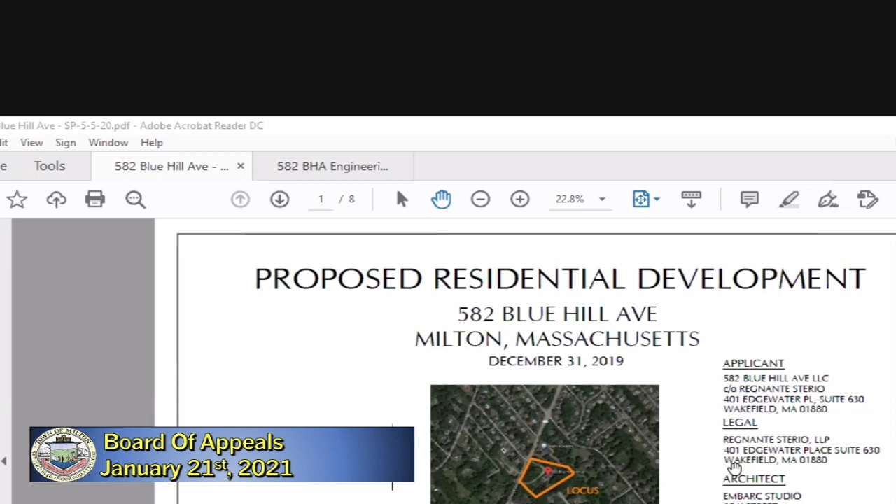The cover sheet is exactly that. It shows you a locus of where the site is, located along Blue Hill Ave. We typically use a Google Maps insert with north straight up. It gives you an idea that Blue Hill Ave is running in a northeast-southwest direction. Team members are here. Contact information you can all find over in this particular location here.

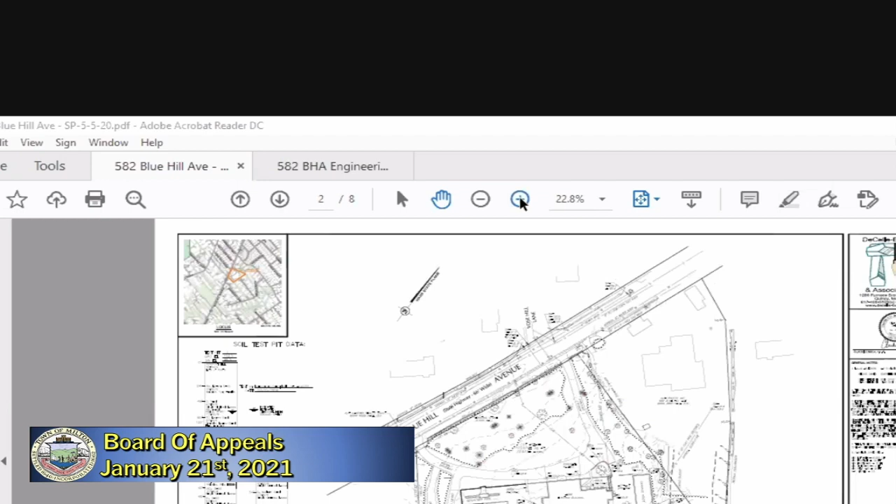The second sheet is a land survey plan. The detail on this particular project was substantial with regards to the house and the number of trees that we had to locate, the wall along Blue Hill Ave, the utilities. Also, you'll see you have an existing 12-inch water main along with a 6-inch water main located on the other side.

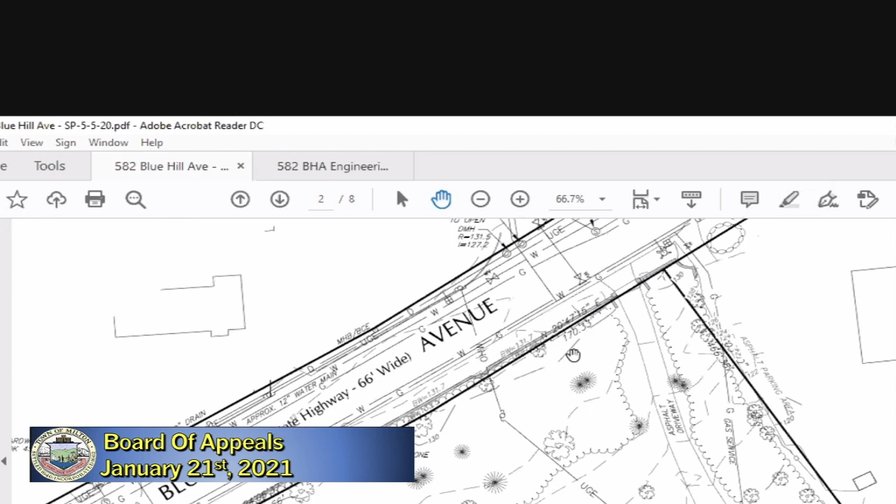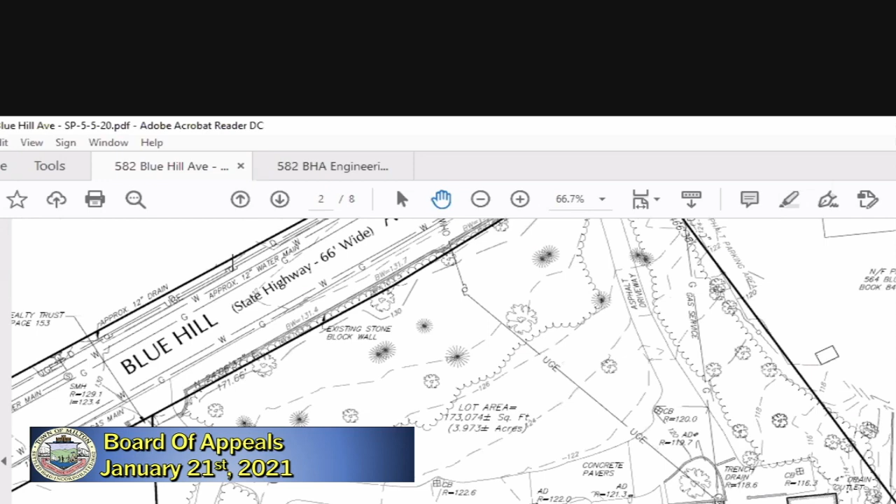You'll see the stone wall that isn't retaining, it's just more decorative, that provides privacy for the lot itself. You can see the detail for the existing homes and the carriage house, along with the circular drive that provides access into the lot currently. You have a gravel drive that provides access to the back, to a lawn area, as well as a bocce court, which I'm a fan of, to tell you the truth.

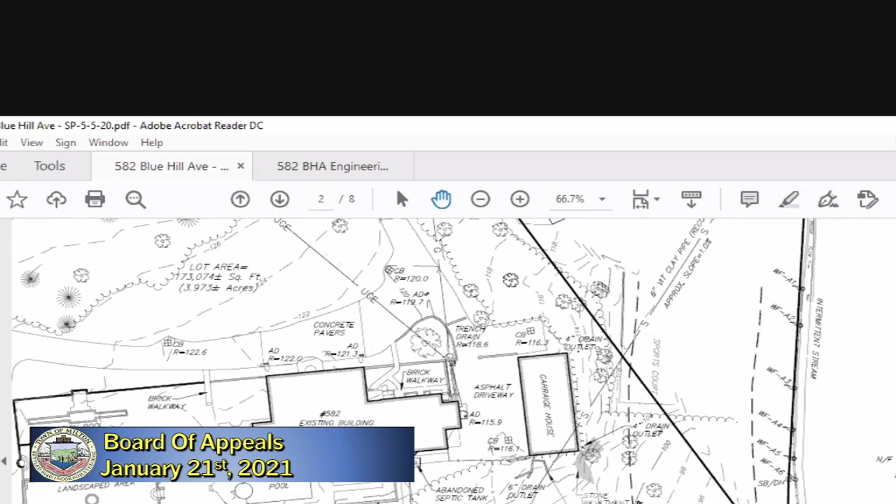Also, we've located a wetland. We've received an ORAD from the Milton Conservation Commission with regards to the wetland resource that is located off-site. It's a bank of an intermittent stream located with the wetland flags here. We had a professional wetland scientist, Ecotech, out of Worcester, delineate this and prepare the filing with the Conservation Commission. You can see the applicable 100-foot buffer that comes onto the property, which is the reason why we had to delineate that particular stream.

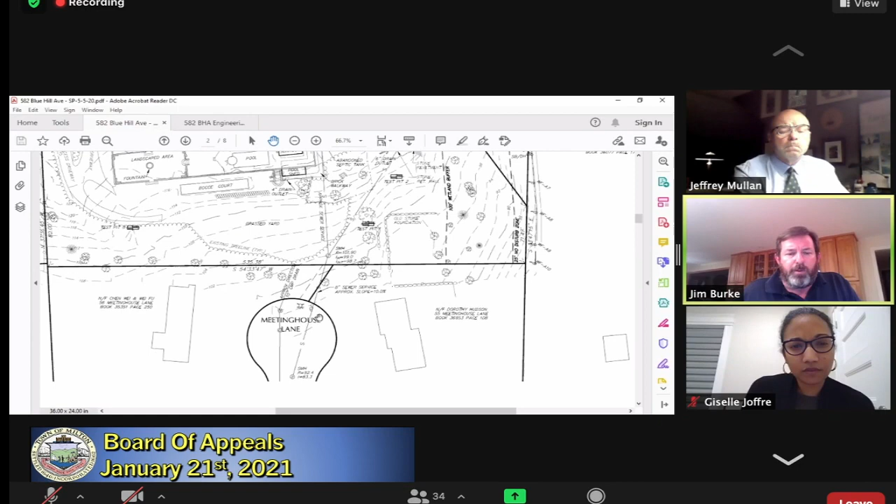Down south, you can see a little bit of detail that we did on Meetinghouse Lane. The drainage, as well as a sewer manhole, provides some utility identification for Meetinghouse Lane and how it impacts this particular lot.

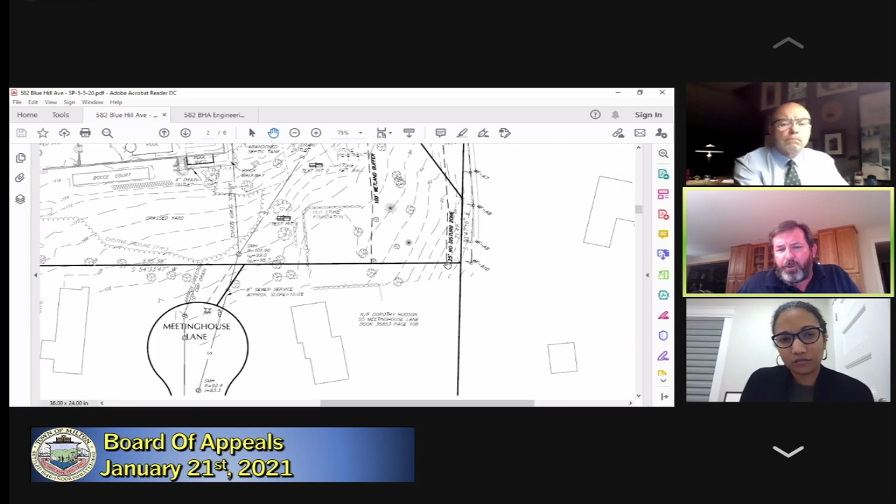The topography, you can see we're running at about, I think that's elevation 130. My eyes are getting bad. Let's see, yep, 130. And it slopes all the way down to the westerly corner to an elevation, I think that's, let's see, I'll take a peek at that as well. There we go, here's 90 here, and it drops off significantly in this particular location.

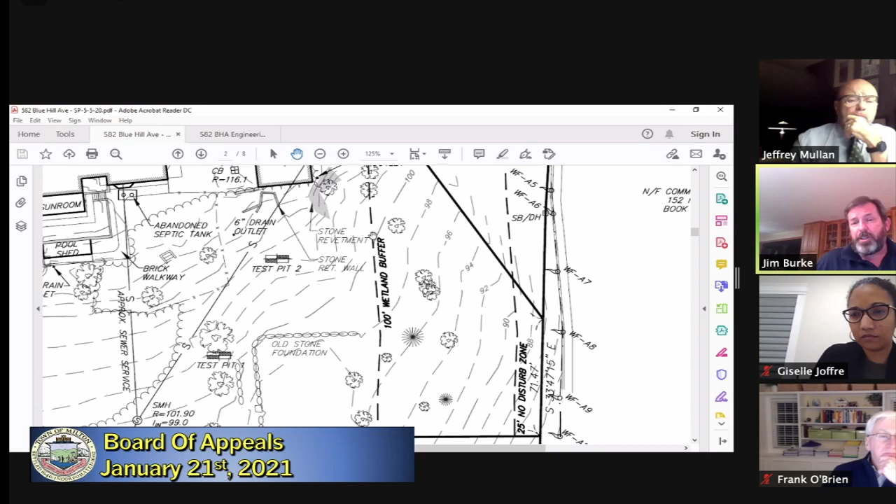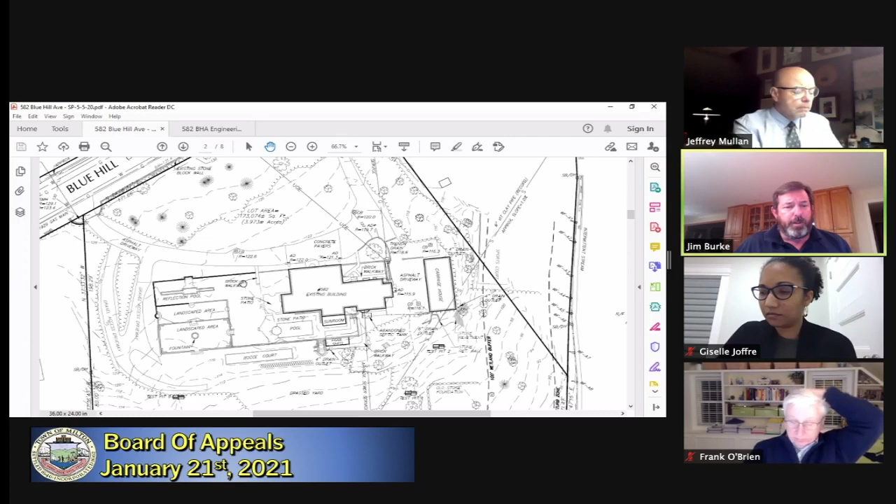But you're looking at a decent slope for the particular lot. But you can get kind of a total view of the lot, and everyone will be able to do the site walk and get a feel for the 4 acres that we've detailed on this particular plan.

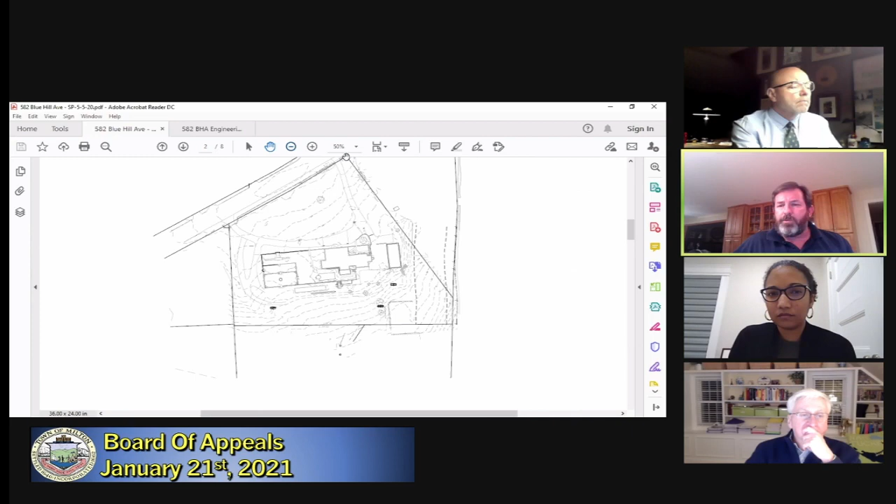What I'm trying to do is move to the next page. There we go. Let's try that.

The next plan is a construction management plan, really just designed as a precursor to a SWPPP permit, which is, since this is over an acre of construction, that we'll have to file a permit with the federal government to make sure that we're doing it in a manner that meets sediment control, stormwater control, et cetera, during construction.

We have an erosion control barrier running around the perimeter of the site at the limit of work. You can see the construction apron here. We're going to be using the existing curb cuts to access the site, and both curb cuts there. We'll be relocating a portion of the wall to redo the entrances to meet Mass Highway requirements. So there'll be some alteration of the existing wall here.

What I'm also showing here is the removal of some of the trees in the area that are marked out in red with a line through them. Those trees are all to be removed. If it doesn't have a line through them, those trees are going to be staying. As you can see, most of the site is being removed, and we're going to be looking at a clean site to construct the building.

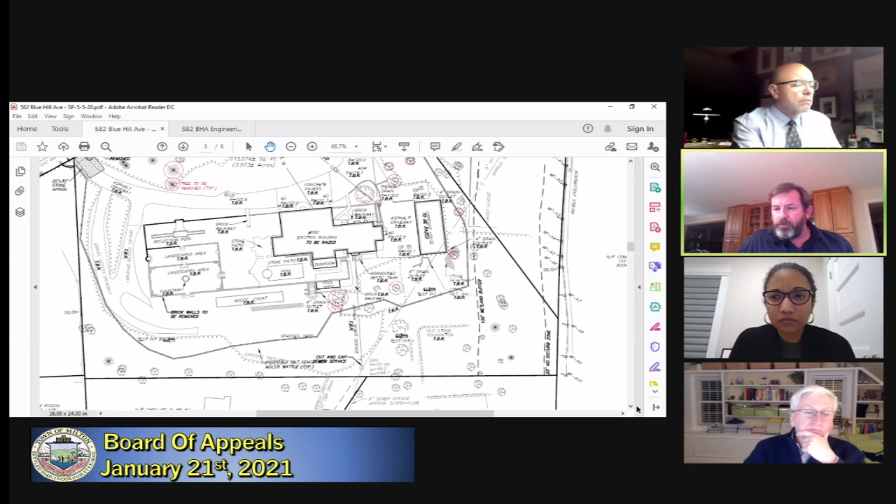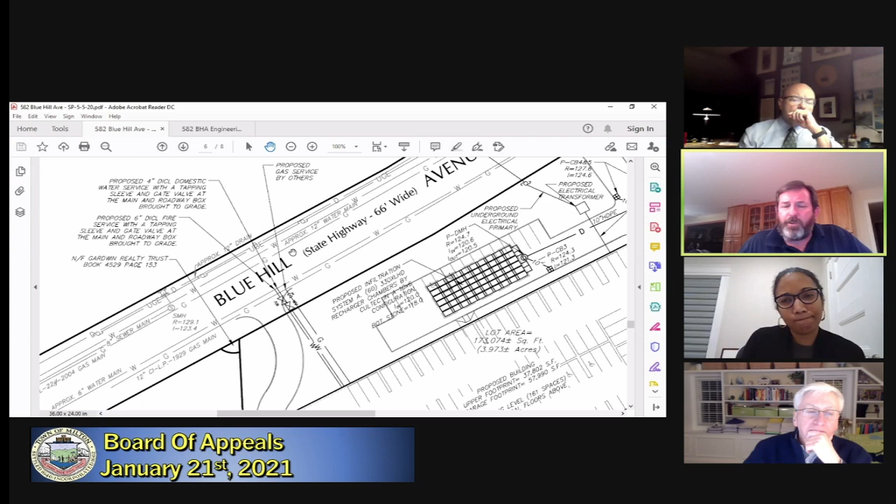So I don't think we necessarily have a problem with that. It's just right now the existing service is connected to the 6, so we propose to do the same. But I don't think connecting to the 12 would be that much of a concern. Gas line, existing main here with a gas service coming in to provide gas service for the building. And again, underground electrical service to here to a transformer here.

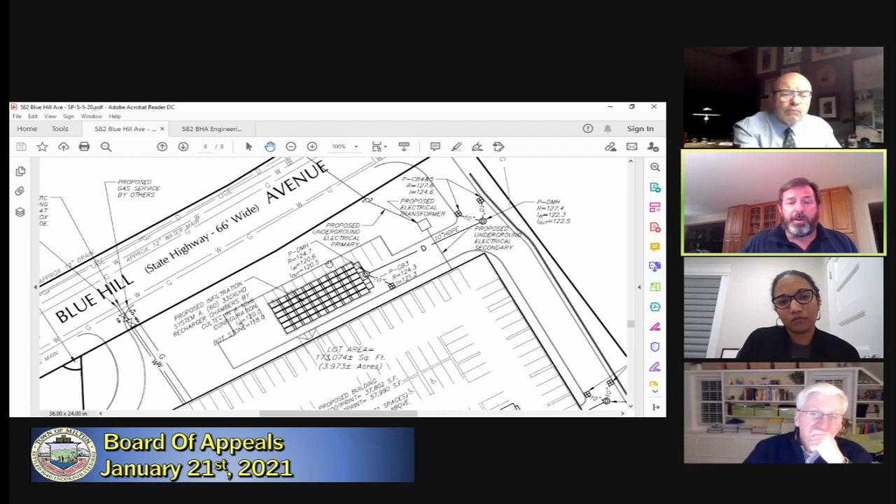Utility purveyors like the gas companies and the electrical company, they'll have some input with regards to the final design, and we can certainly get into the nuts and bolts of that in the future. As far as the sewer goes, the existing sewer is a little unusual. There's an existing sewer service that runs from Delphi Academy across the property, with no really known easement,

but it's there nonetheless. And what we're proposing to do is connect to it here with an underground drainage, underground sewer system for area drains for the garage, as well as the domestic line that'll connect to this line as well, and connect to Meeting House Lane.

This is the existing sewer manhole that we pretty much located both, and I wouldn't necessarily say it's an exact straight line, but we just kind of connected the dots with regards to how this sewer fits. If you look at the existing conditions plan, you'll see as we connect the dots, it goes right underneath the carriage house. That may or may not be true, but the sewer line itself is certainly an acceptable source for a sewer connection.

Now I can guess that the big item tonight is about the drainage. The site right now has, I think, 4 catch basins on it, trench drain and the like, with pipes leading into it from other catch basins and I believe from the house itself. I've never been able to find the outlets,

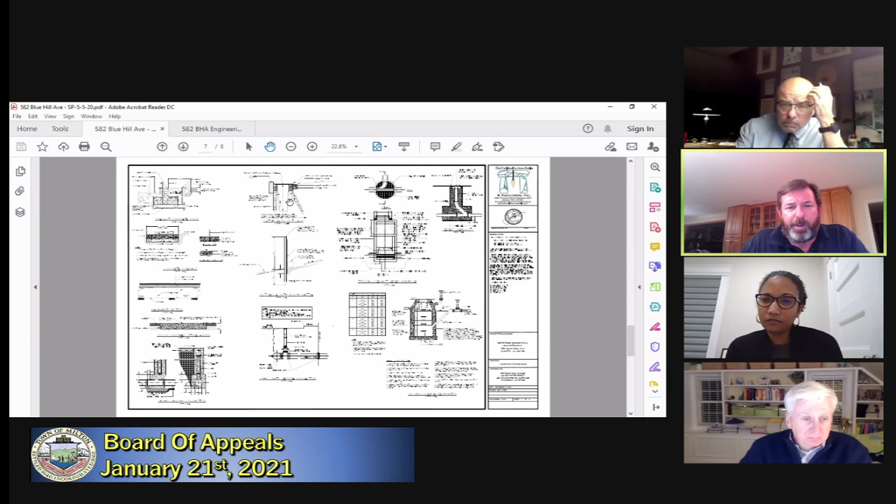The next set of plans that we have really just kind of relate to construction details. You're looking at sewer cleanouts, and this is an oil water separator here, and erosion control barrier here. This is a catch basin insert for construction. Kind of the nuts and bolts to allow a contractor to put together a price for, to really define what kind of structure am I using.

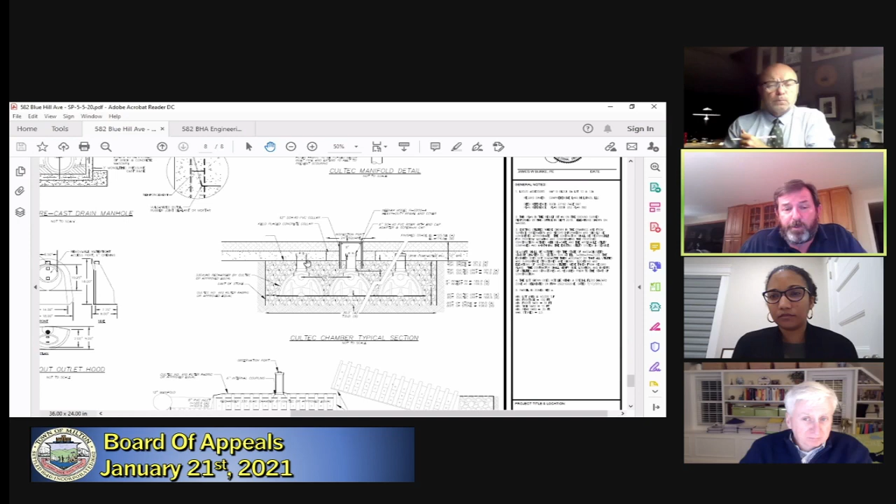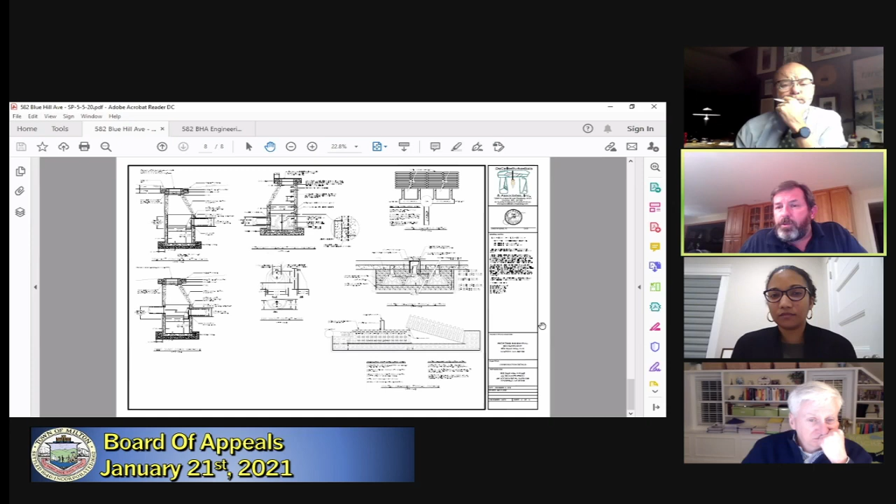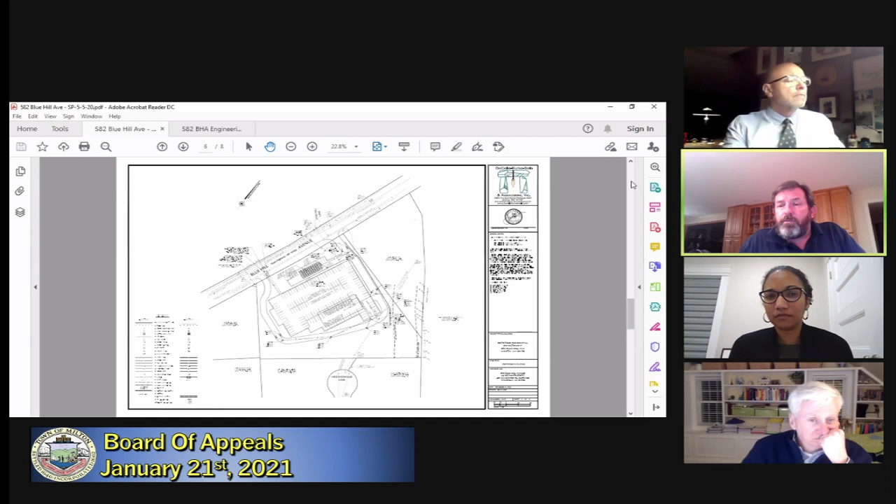You have the deep sump manhole right here. Here's your Cultec chamber system with crushed stone that provides the storage underneath either the paved surface or, for that matter, the building. So I'd say that is the civil site engineering plans. I can go through the calculations specifically with regards to the flow events.

Why don't you hold on that, Jim, and let's get some questions and conversation going. I think there was a significant amount of interest in stormwater flow, offsite in particular. So I think we can get a conversation going, and perhaps you can discuss the calculations at that point. Is that acceptable? Yeah. I'm just trying to figure out how to stop sharing here. No, that's okay. I'm going to have some questions, and it'll be good to share with respect to the plan.

So here's what I'd like to propose, similar to last night. I'm going to ask the members if they've got questions. I've got questions, and I'd like to ask those, and then I'm going to ask Mr. Hill and his team if they've got questions, and then I'll open it up to the floor. I want to acknowledge for everybody, hang on a second, Mr. Stephen Howard, who I know is in the audience.

He sent us an email this afternoon and some photographs. So I want to show people the photos, and then perhaps have Mr. Howard discuss the photos since he took them. And then I expect that the neighbors will have questions on the offsite, and Mr. Howard in particular. So that's coming up. It's along the lines of the questions we asked last night of you, Mr. Burke. But let me start at the top, if that's okay.

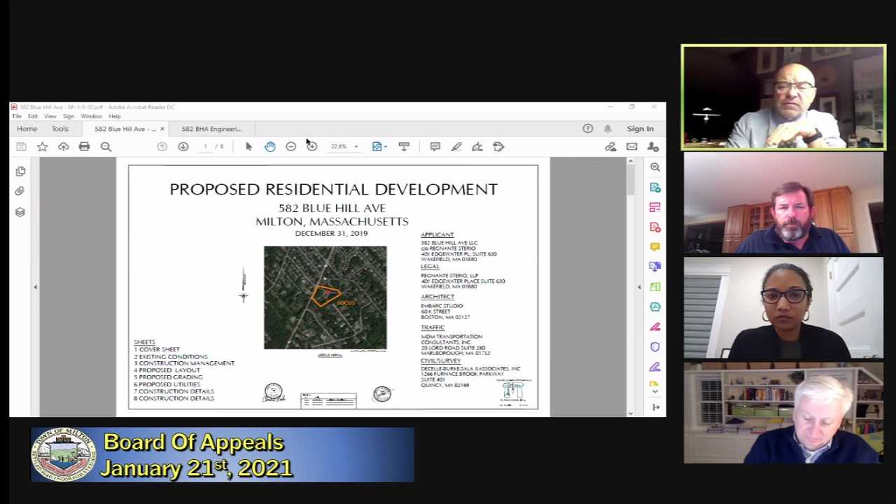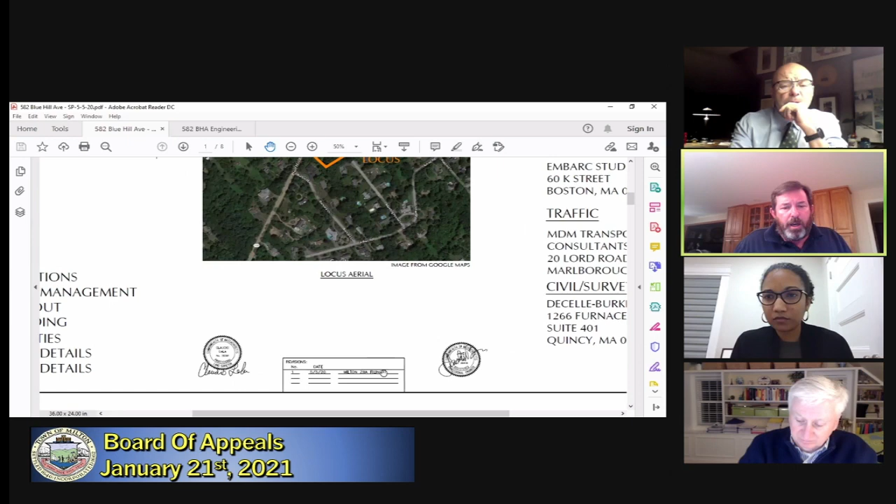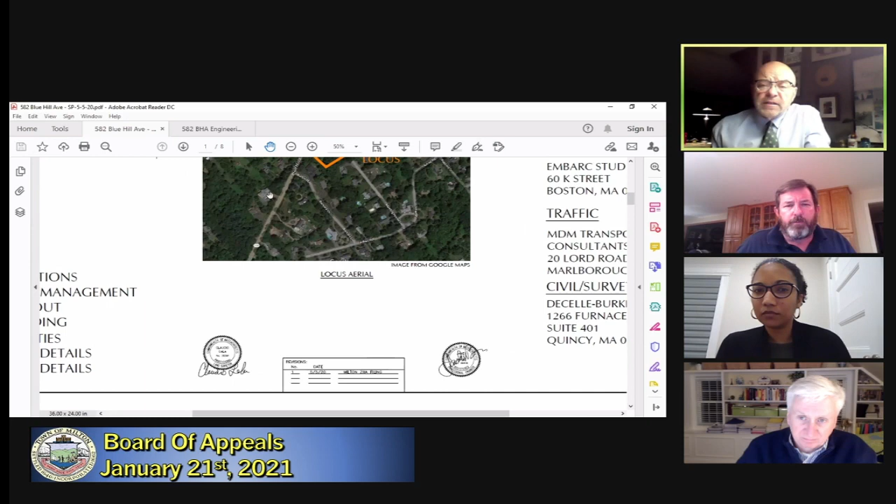This set of plans is dated December 31st, 2019, and it's stamped and signed. Does that mean that these are final? No, and in fact, if you look here, we actually had a revision date of 5/5/20 for the Milton ZBA filing. So they're stamped as we authorize them to be presented for permit. That's all. Okay. Is all of the work that we would consider site civil or civil engineering that you're proposing to do, with the exception of the sewer connection to Meeting House Lane, within the limits of the site?

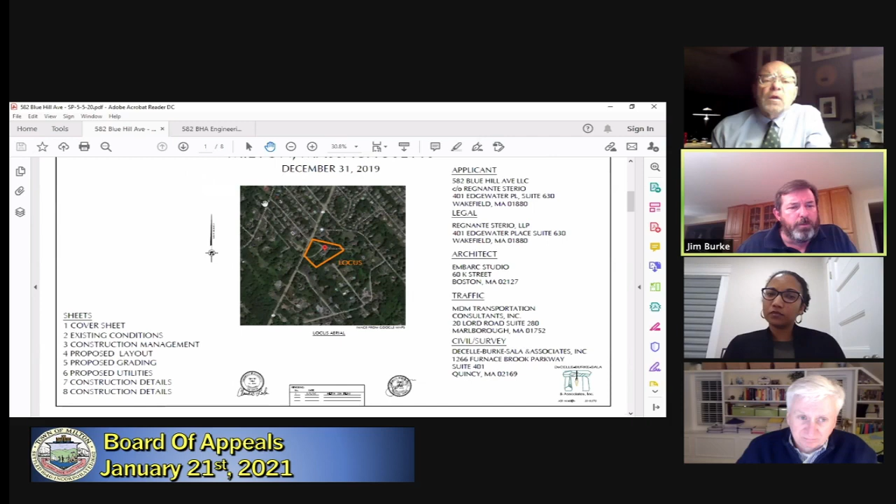You do have the connections to the State Highway. Yeah. Okay. But yes, as shown on this particular plan, you can see this double line right here represents the erosion control, a silt fence, if you will. We did not stake the limit of work. We did stake the center line of the proposed roadway and the corners of the proposed building. So you'll see how that fits within this particular envelope, if you will.

So there's no proposed work other than even the sewer connections being connected up top here. But the only thing really outside the property line will be the utility connections in this location here. I see. So the connection of the sewer at Meeting House Lane isn't a physical connection. You're just taking advantage of the fact that there's a sewer there. That is correct. But you also said there's no easement?

I wouldn't necessarily say that. That sewer is probably older than I am. So the fact that it exists in that particular location, providing a service for an abutter, it'd be my personal belief that it's kind of prescriptive, that it's providing a service. The current owner knows it's there. It's not like you can go and dig it up and cap it because it's on your property. That's my understanding of it.

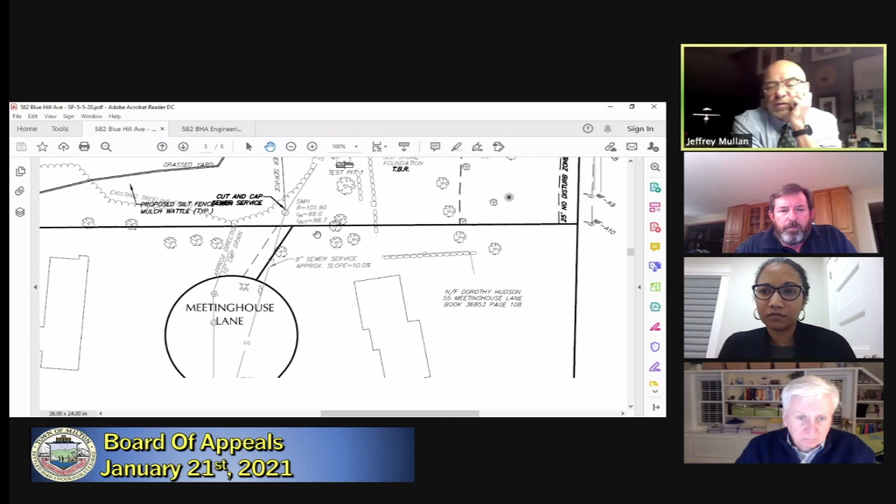We're going to probe that a little bit more. I can't see the property owner's name now, formerly Dorothy Munson, is it? Hudson, yeah, Dorothy. Okay, so I'm interested in that issue. I know that was also an issue that the town raised, but let me ask you, can you bring the plan back up to Route 138?

You said you located the curb cuts. Do you actually have the permit from MassDOT on those curb cuts? For the proposed ones or for the existing? The existing. That's a good question. The curb cuts exist. That's probably been there for a long time. I think they probably have the same rights as the sewer, to tell you the truth.

Yeah. I've heard and I saw in the application that the applicant is going to use the existing curb cuts. It begs the question as to whether or not we know where the existing curb cuts are. I mean, I know where they physically are. I'm wondering where they've been permitted to be. So the question, go ahead.

I'm interested in whether there's a valid permit off the state highway to access the property, and if so, can the applicant provide it? And then secondly, is the applicant proposing to get a new permit from MassDOT to recognize the change in use and the modification of the driveway? Absolutely. That is a requirement from MassDOT. So you'll be making an application to MassDOT for a new highway access permit? Correct. Okay.

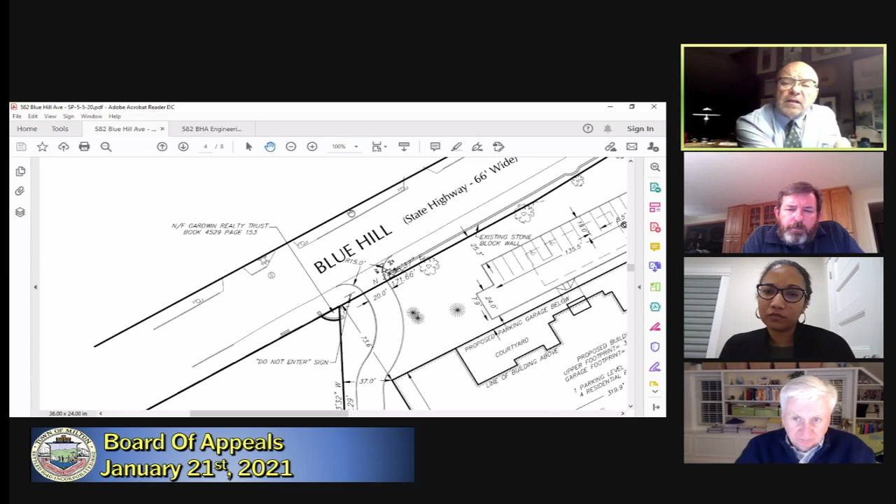Can you tell us what the distance is from the edge of the state highway to the current building? What's the current setback? To the existing building? Yeah. Don't have it there. Let me check to see if I have it. Well, what I'm interested in is how much closer is the building going to be to the road than it currently is? Let me check the zoning chart right here.

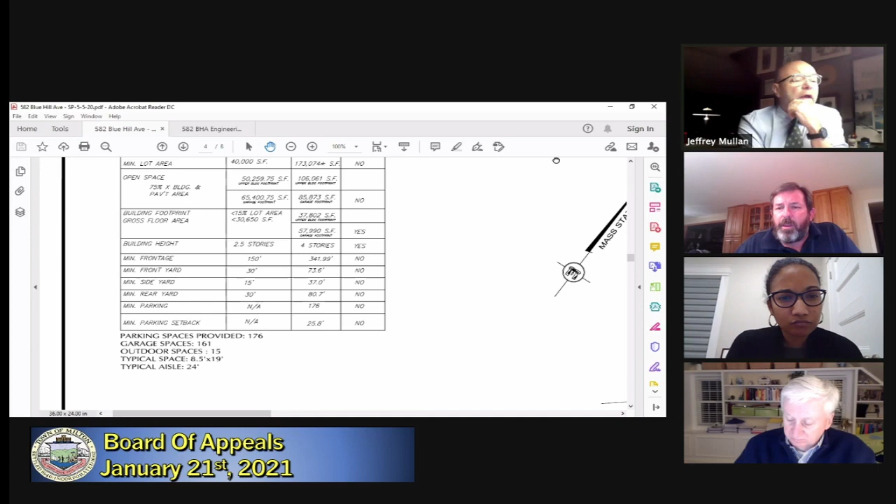So front yard, now I just have required. I don't have existing, but I can certainly get you that information. Okay. You can get that to us. I mean, it somewhat speaks to the massing that we spoke about yesterday. I think to a casual observation of this property, it feels like maybe the building is going to be around where the current building is, but it's actually much closer. And I just want to scale that off and get a better sense of the actual dimension of that.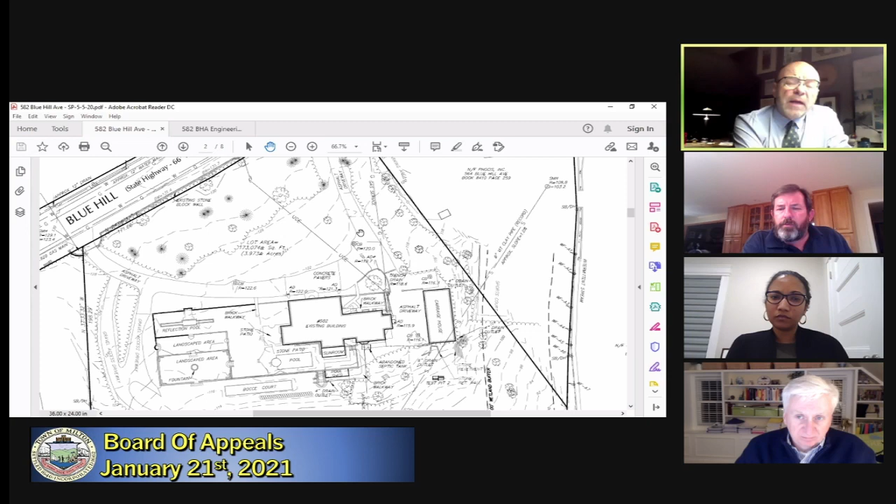Let's see. Oh, well, I have two more questions. So you mentioned, when you were showing this plan, or maybe the next one, that you've marked the trees for removal. Yes. What are the criteria? Obviously, when a building is going to occupy the site, you have to take the tree down. But what are your other criteria for taking trees down and saving trees? Is there a bias towards saving trees, or is it good to remove the trees so it's easier to build? What are you thinking on that?

You know, to tell you the truth, as far as... Well, you are telling us the truth, right? Yeah, of course. Okay, well, good.

But if it's within the footprint and within the limit of work, the tree is generally going to be removed. Now, that certainly is dependent upon grading and the like.

So we are marking these trees as probably a good indication that these are coming out because of the building being constructed as well as the parking lot in that particular area. So, this may be an area that overlaps with the landscape architecture and the presentation we heard last night, but you've heard from the members of the board and from the neighbors that people are concerned about screening.

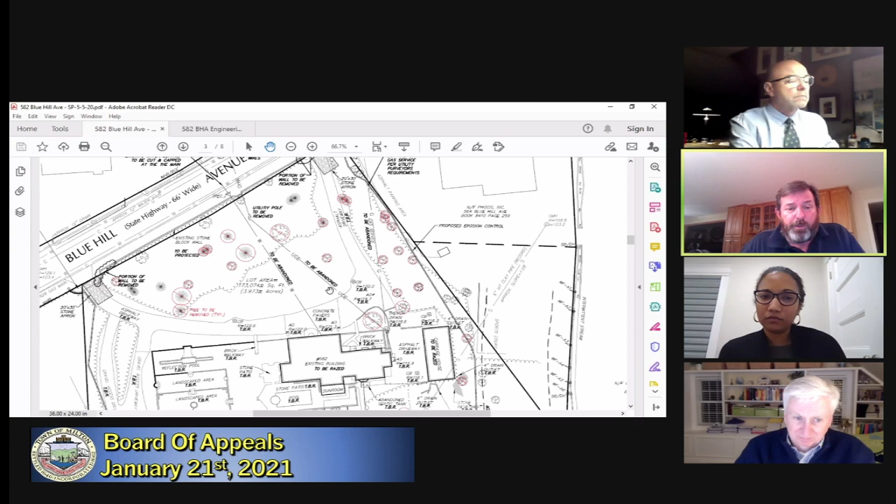The way I would answer that is that as far as the screening goes, you're right, it's for the landscape architect to come up with a scenario that allows for the building and development itself to be screened from the neighbors. Let me go again. Here are the trees that we're proposing to save. There really aren't any significant trees over on this particular edge, but we're saving trees here and right along the front.

As far as the grading, as discussed earlier, it was really a goal to maintain the grades as much as possible. When it's all said and done, I think this is a cut site. We'll be filling this edge to allow this driveway to be graded as shown. But for the most part, you're looking at some fill removal to install the underground garage up in the front here, and less earthworks here.

And that was really the focus of the design request from the applicant, to minimize the grading on the edges as much as possible to keep the earthworks down and the trees on the edges viable as much as possible. Okay. I have two more questions. Then I'm going to ask my colleagues to ask questions.

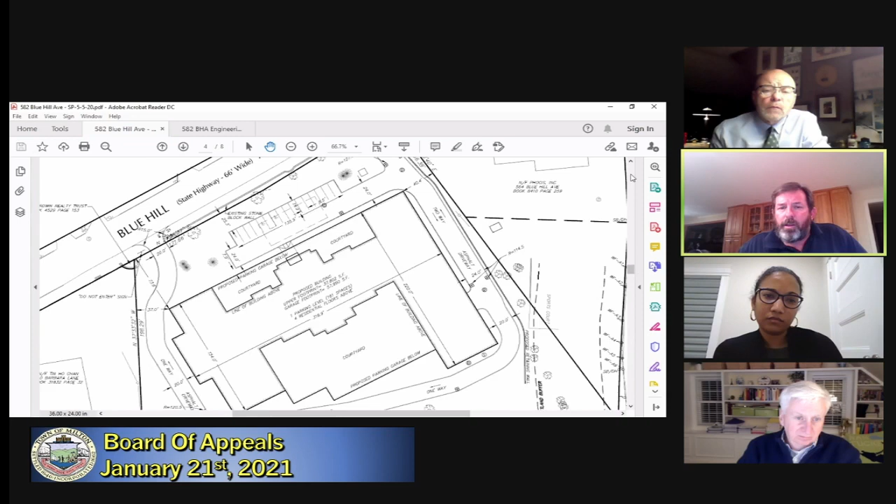Can you put that on there? The existing conditions plan's right here. All I have is hard copies of the plan that we're going to be using for the site walk. But it shows the building footprint on the lot, as well as the drive, so you can have an idea when we're walking around what the points represent. We also have on that plan the point numbers that are numbered on the stakes as well, so you'll be able to orient yourself very easily.

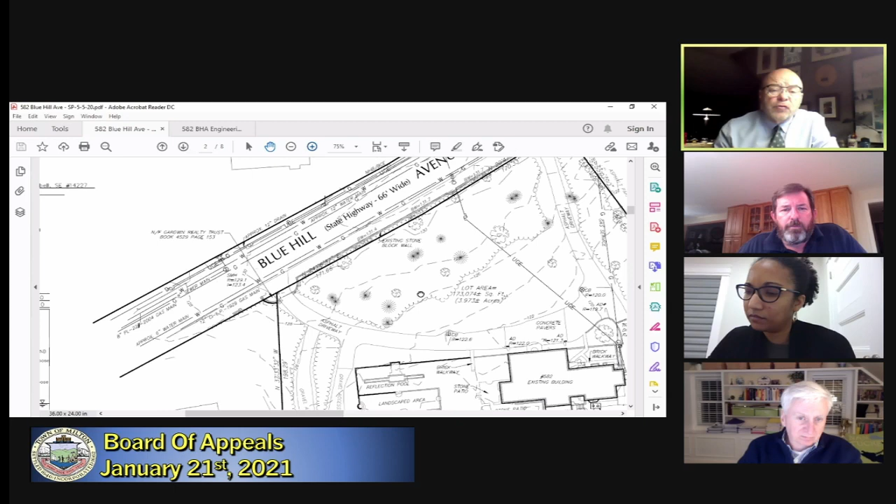There's been a lot of attention put to the gardens, and I'm interested in seeing a drawing that shows the improvements with respect to the gardens. Okay. And last night, I think Ms. Joffer had asked if there's been an alternatives analysis done with respect to the gardens. So that's an area that I don't think we completely understand, the extent of it and the work that's been done with respect to the alternatives.

I'm also going to make a comment later in the hearing when Mr. Schomer arrives about a peer review of that issue, just given its significance, its relationship to local need and the interest that's been expressed by the neighbors. So that concludes my comments. Let me ask Ms.

Joffer, if she's got any comments or questions that she would like to ask Mr. Burke. Ms. Joffer? Thank you, Mr. Chair, and thank you, Mr. Burke, for your presentation. It's very clear and helpful.

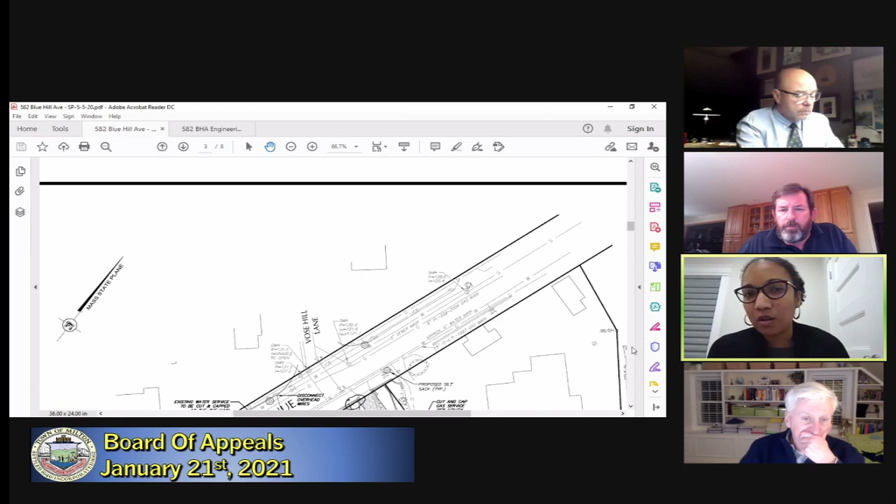I have a question about soil erosion, and in part I'm just hoping you can talk a little bit more about it, because you mentioned that there's the erosion barrier, and I know trees are being removed, and there's already this fairly steep grade. So what are the risks of erosion and how are they being prevented or mitigated?

The risk for erosion is limited, despite the slope. And the slope isn't that significant where it can't be controlled. There are different types of methodologies with regards to erosion control and also minimizing the off-site sediment transport from outside this limit of work. That's what this represents. It's kind of the last line of defense for erosion control.

And it'll be very important and maintained daily, really, just to make sure that this line remains intact and not stressed, because over time it collects up sediment, puts a little stress on the fabric, and if you don't maintain it, it'll end up breaking through and the like.

So by filing a SWPPP permit and by filing this construction management plan, the contractor will be responsible for maintaining soils on his site, whether they're being brought in a stockpile area, or for that matter, excavated out and stockpiled on site. The contractor ultimately is responsible to make sure that site during construction remains steadfast with regards to no erosion impacting abutting properties, and for that matter, outside the limit of work.

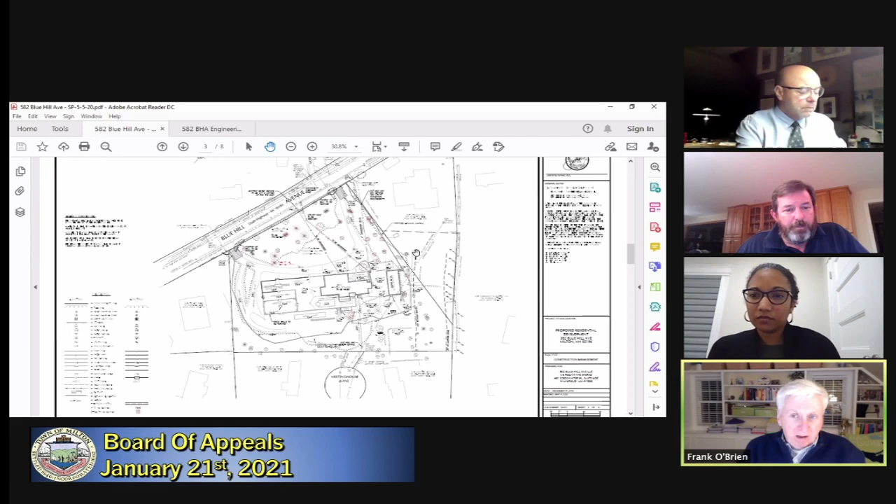I assume it has sufficient capacity to handle a significantly larger structure that's being proposed? You'd be surprised how much a 6-inch conduit at, call it, a 4% slope can handle. I don't know the volume off the top of my head, but it's capable of handling the peak flow for 118 units. The sewer mains back in the day used to be 6-inch. Now they upgraded the minimum to 8-inch.

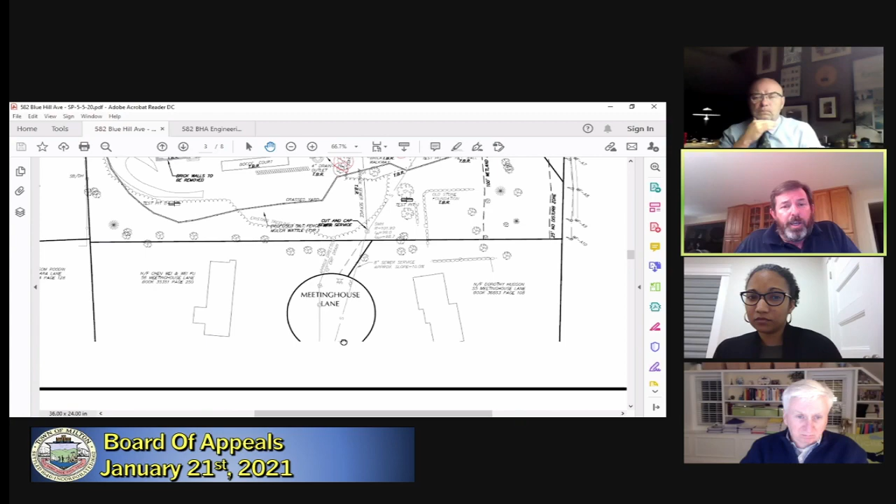And I don't necessarily agree with it. I think sometimes when you create a larger pipe for flows that aren't designed for a larger pipe, the cleaning efficiencies of the solids for that pipe are diminished. I've had this conversation with several public works directors and engineers, but they've set their minimums, and plumbing codes are sometimes different than civil site engineering codes. But in the end, the sewer line from Meetinghouse Lane certainly is sufficient to handle that additional flow. And the other thing, I was thinking about this because I thought this might come up.

You have this sewer manhole here, the top of the manhole. You're at elevation 121. Now, I certainly can't get the garage flow. We're required to put in area drains for garage flow in case of a ruptured tank or oil spill or whatever. And those area drains tie into an oil water separator, which once that's installed, needs to be connected to a sewer, not a drain line.

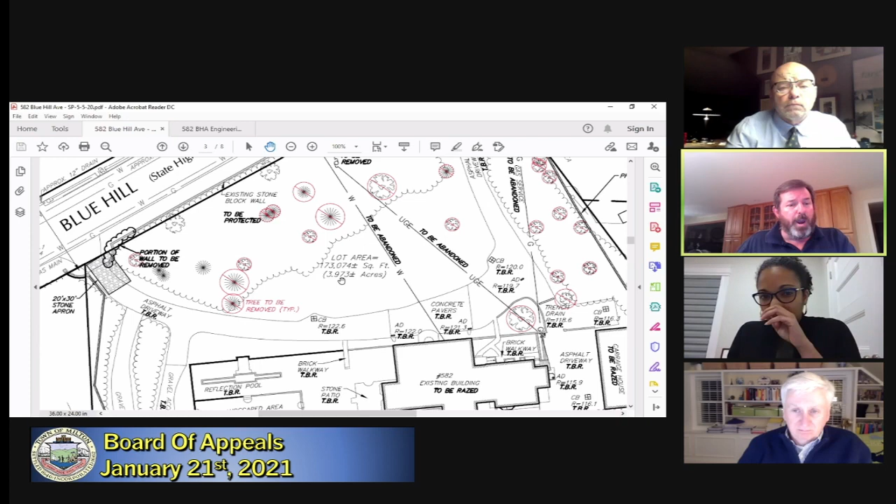So that sewer line, and those flow very infrequently. So the flow out of an oil water separator, even out of a 160 space parking lot, is minimal and de minimis. In a pinch, I certainly can get the first floor at 126.5 to flow across the street and connect up to the domestic sewer at 121.7 if there's a capacity concern for Meetinghouse Lane. So I think the capacity issues for sewer are a minimal concern for this particular project.

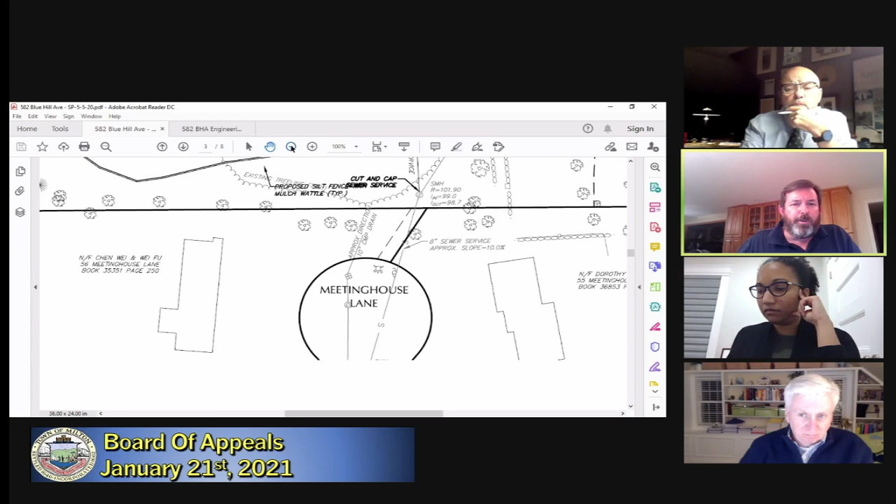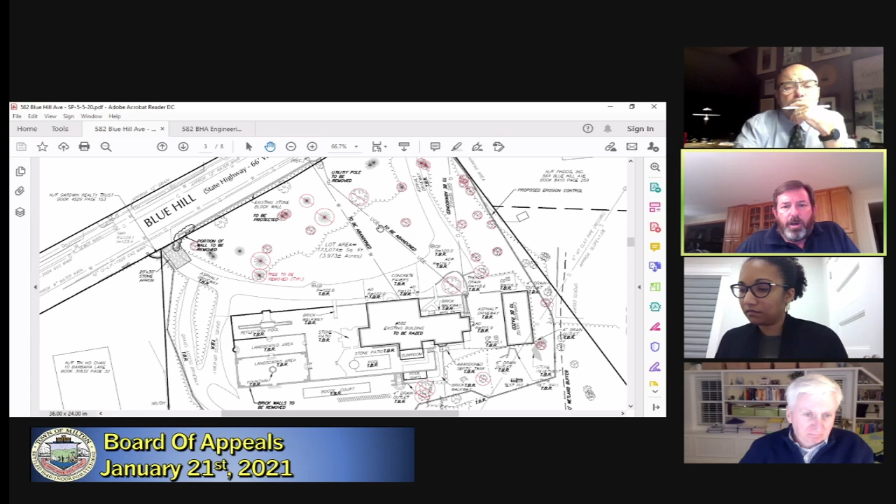I believe the water supply also, with a 12-inch main with the allowances to connect to that, is not a concern for this. I'd say given the concerns raised by the neighbors with regards to drainage, stormwater is the biggest concern for this particular project, given the gradient of the slope as it slopes down towards Meetinghouse Lane and to a single family residential neighborhood in the area. I'd say that's the big concern, and I'm prepared to design something that alleviates those concerns. I think I talk too much, and if you have any other questions, I'll certainly answer them.

I do have one or two other questions, but I'm wondering if the chairman might have a question. You have a question, and it's a question to just follow up on what Mr. Burke just said, and that is, I heard you say that the stormwater is an issue, and that you're confident you can design something to accommodate the stormwater. And then last night we talked about the same issue, and I think I asked if you thought that there was going to be any exacerbation of the conditions on neighboring properties. I think the answer was no.

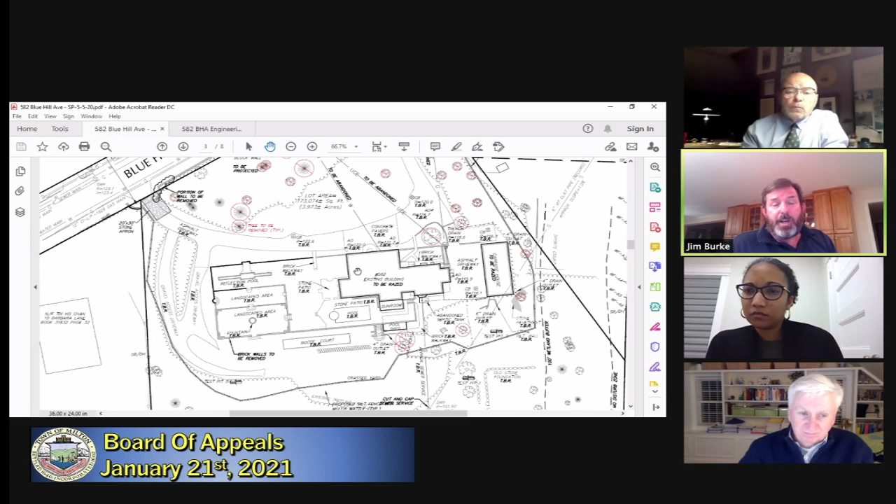I wonder if you could share with us the steps that have been taken to control the water on the site now, recognizing that at a point later in the hearing, we're going to hear from the neighbors about the situation, particularly down gradient, the people who are below the site are having with water. So maybe you can speak to the steps you're taking to control that water on site. Certainly. Well, the steps that we're taking is we're creating recharge basins for the site, two of them that are large, they're significantly large. I want to say they're 5,000.

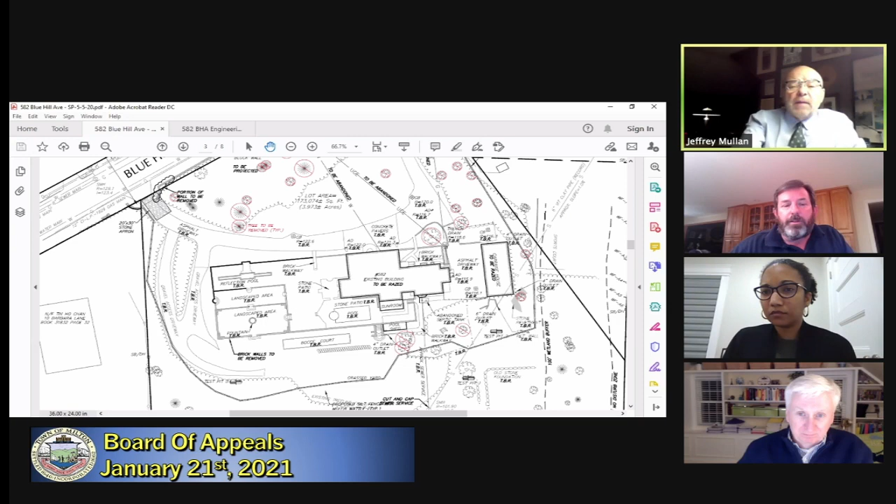Mr. Chairman. Mr. O'Brien. Just jargon alert. I may be an amateur civil engineer as much as I'm an amateur architect, so bear with us. So when you say recharge, what does that mean to the average person? I'd say leaching pit. Okay. Can you put the plan up that shows where this is? Sure. Yep. Thank you. Right here. So you have the one recharge system here, one recharge system here. Okay. Now, they are, let's see, I don't have them dimensioned, do I?

So you excavate out the loam and the subsoil in this particular area, you level it off until you get into the soils that we found on site. Now, the soils we found on site were sands and loamy sands, which I consider to be A soils. Again, what's an A soil? An A soil is, you have four families of soils, hydrological group soils that define runoff off the property. So an A soil is like sand and gravel, so water percolates through very quickly. You have a B soil, which is just underneath that, and it's got a little bit of silt in it, like a Cape Cod sand, if you will. If you're walking on the beach. So it's got a little bit of silt to it. It has a little bit of stiffness to it.

Then you have a C soil, which has a lot more silt in it. A C soil is a tough soil. You'll find that over at Hillside Street and over by the Forest and Harland. Those soils over there are tough. And it's just a lot of silt, tightly compact, and difficult for water to drain through. Then you have D soils, which is basically like a wetland soil, a clay, and water does not go through it whatsoever.

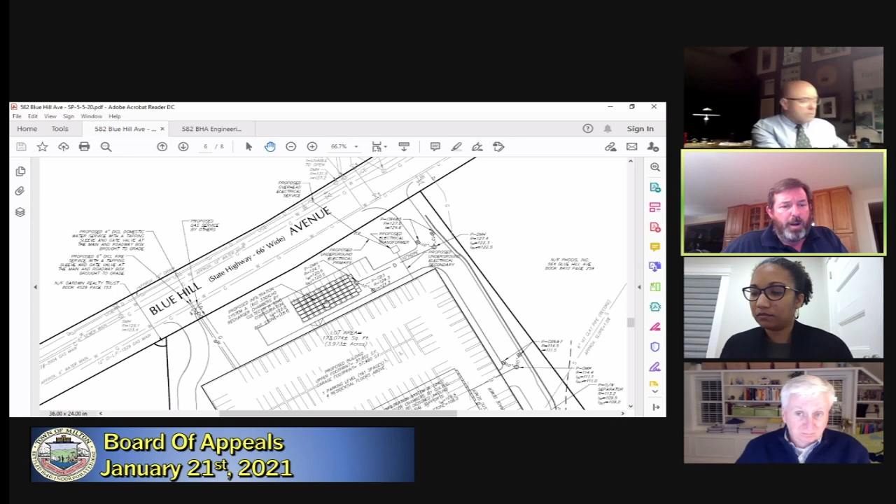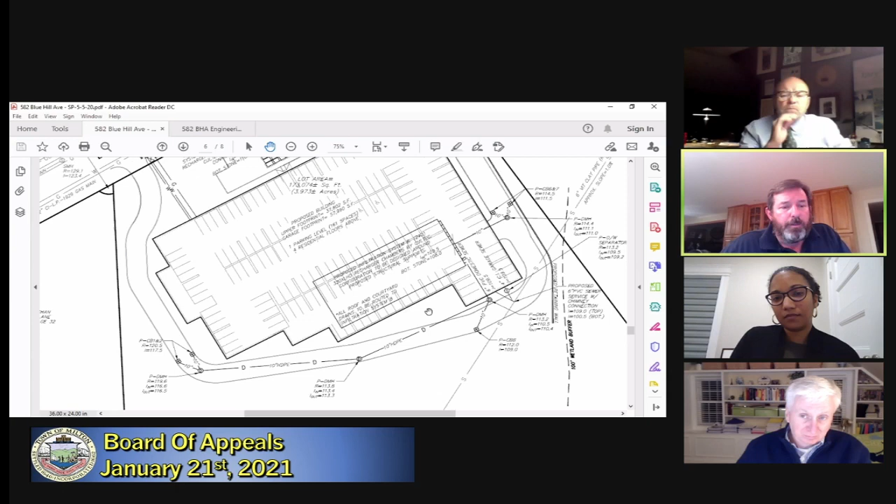Now, this system is a little bit different. It's larger, but if you look at the area that's contributing to it, you'll see that it includes this entire roof as well as this drive and this drive. And percentage-wise, it's probably a little bit smaller than this one. The 100-year event for this particular system, it actually fills up. So the water will come down and actually pond on top of this low spot right here. And it'll pond up to fill the curb, a 6-inch curb, and pass over the top of that curb like a weir.

And we've modeled that in HydroCAD, which will be reviewed by at least 2 engineers, and they'll tell me what they think of it, and I'm prepared to answer those questions as well at some point. And so the 100-year event spills over that curb at a lesser rate than it does when the stormwater, 8 inches of rainfall, comes across the property and down gradient to Meetinghouse Lane. So it's these ponds that we divert water to during every storm event that buffer and protect the people down gradient of this property.

How is that? Excellent.

Okay, so I'm a homeowner. By the way, I have one of those hidden sewers going through my neighborhood as well, so I'm not totally unfamiliar with them. But my experience with drainage is if I don't take the leaves out of my gutters, then my gutters overflow and I've got problems. What kind of maintenance is needed for these recharge systems?

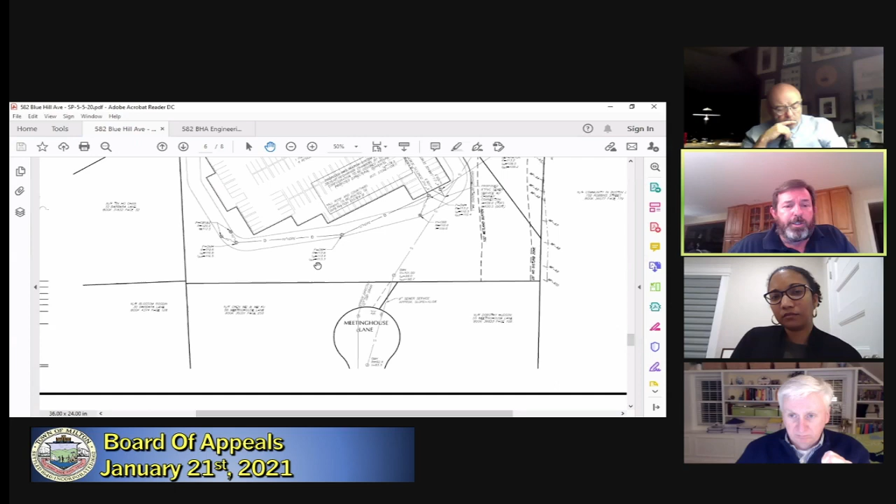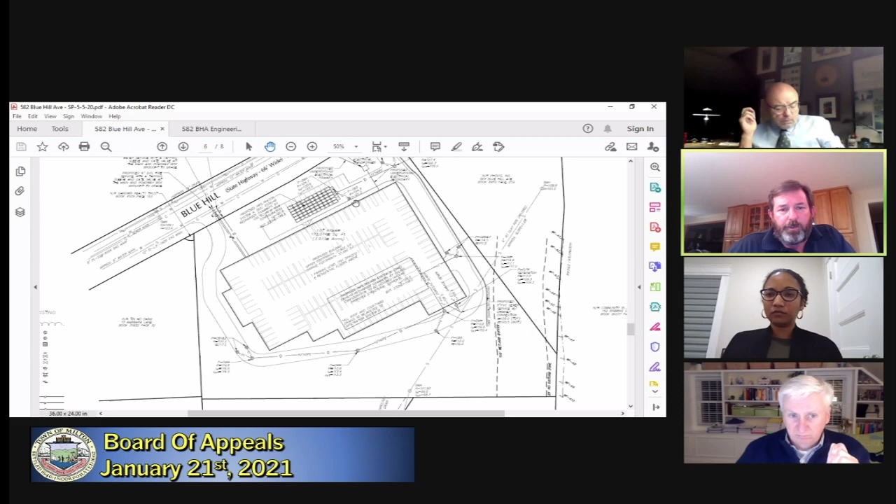Excellent question. We're also required as part of the stormwater management standards to generate an operation and maintenance program to maintain these systems. The same goes for the catch basins out on Mass Highway, with regards to the leaf and sediment collection. The operation and maintenance plan for this particular system has these structures looked at on a quarterly basis. So you'll be in there looking at the catch basins to see if they need cleaning.

They recommend cleaning when the sump, I believe, is halfway filled with sediment, and the sump itself is 4 feet deep. So when you have 2 feet of sediment, you call up the vacuum truck and have them clean out this sump. But if they're going to clean out this one, they're going to end up doing all of them. There'll be observation ports for both systems here. You'll be able to inspect the bottom of the stone, see if there's any ponding in these systems, which would suggest the start of failure.

There are street sweeping programs that can be implemented. The water quality tanks that I propose, the deep sumps that the peer review engineer and I will get into conversations about in the near future, do the same thing as these catch basins. They take particles offline, but they also do oil and hydrocarbon cleaning as well.

So you're absolutely right. The thing is that you're required to do the maintenance of these systems, and honestly, the private buildings that I've found under private management do a lot better job of it than a lot of others. And you're required to submit these reports. I think in Milton, they go to the engineering department, because they have that stormwater management bylaw that does the same thing.

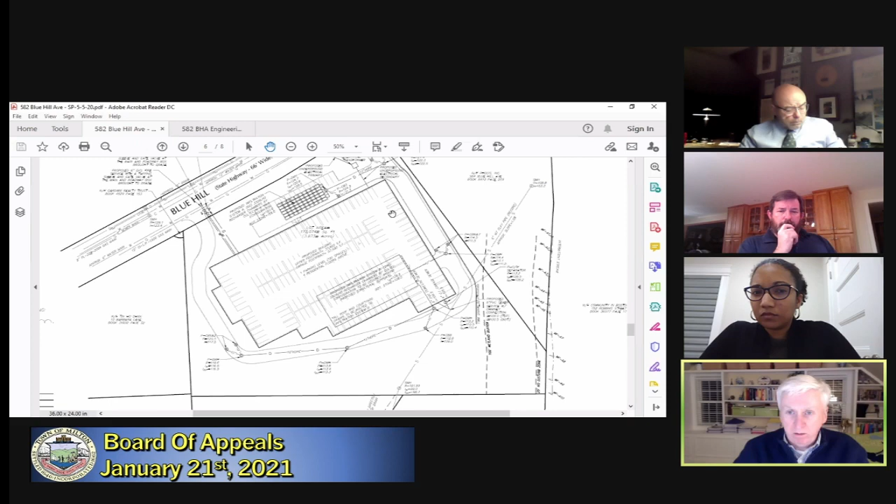Can we talk a little bit about snow management? Clearly, looking at this, we've got a lot of parking spaces that are going to be under cover. We've talked a lot about stormwater flow and stuff like that. What about snow? What's the snow removal plan? Is there a snow storage area? What kind of impact would melting snow have on drainage issues?

You know, the snow storage for this particular site is better than most. You have this whole area in here where you can put it up gradient and have it captured by this catch basin here. It's a little more difficult clearing the snow in this particular area because you'd end up storing it on the down gradient slope where it would go uncontrolled off site without being captured by the catch basins that are located within the roadway itself.

But at the same time, the snow melt is certainly not like 8 inches of rainfall in 24 hours. The snow melt is typically slow and steady, and drainage systems are typically capable, no matter how old they are, of handling that style of flow.

But like I said earlier, in this particular site, there's a significant amount of snow storage areas for the impervious areas. And there's not a lot of impervious management for this site, given that, if I'm not mistaken, it's just under 20,000 square feet of pavement for this lot. The rest of it, the parking lot itself, is all under roof, which will end up being melted and captured in the roof drains and sent to this particular system.

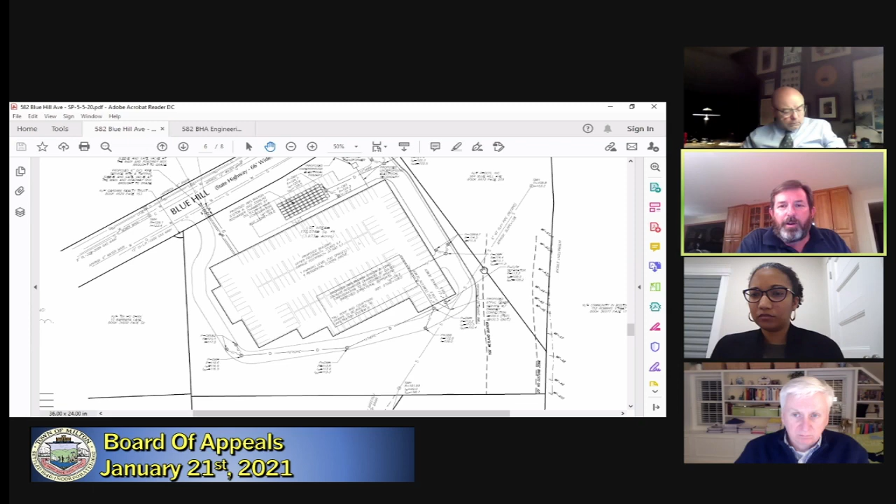While we're talking snow, any concerns or thoughts about the impact of de-icing, snow removal chemicals on the plantings, that sort of thing? The different types of salt have always been controversial. The thing about using the chemicals, I find one's not better than the other. It's actually about using the correct amount, and that comes down to management and knowledge.

If you use the right amount, it's not going to hurt the plant species or create an environmental hazard. The only way that happens is if you use too much of anything, whether it be calcium chloride or sodium chloride or whatever else. There could be a point where you wouldn't even need to use salt in this particular instance, where you can just use sand. The gradients aren't, I think, that significant where a lot of salt would be needed. Just my opinion.

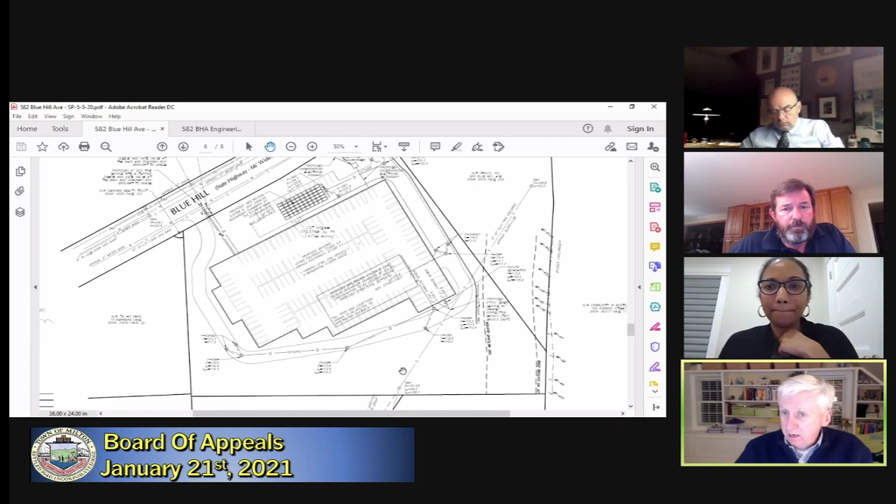Last question, from a site civil point of view, is this a challenging site, or is this not especially challenging? It does have the slope, yet I got the impression that the slope, while figuring in your thinking as you would expect, is not a huge challenge.

To answer that question quickly, no. I mean, I look at the site and I'll be honest with you, I'd change some things right now. I look at it and I could have done some things better. And I'm not saying I won't, but I'm just critiquing my own work as I sit here tonight. But there's, I think, maybe some alterations to the stormwater controls that I could make, particularly to the rear, that would make the situation a little bit better. But to answer your question, no, it wasn't really that difficult.

The gradient actually helps a little bit for collection. But I'd say the biggest spot on this particular job is, yeah, I'd say the size of this system right here. I might split that up into two instead of having one big one. I'd say that's about what I'd like to do.

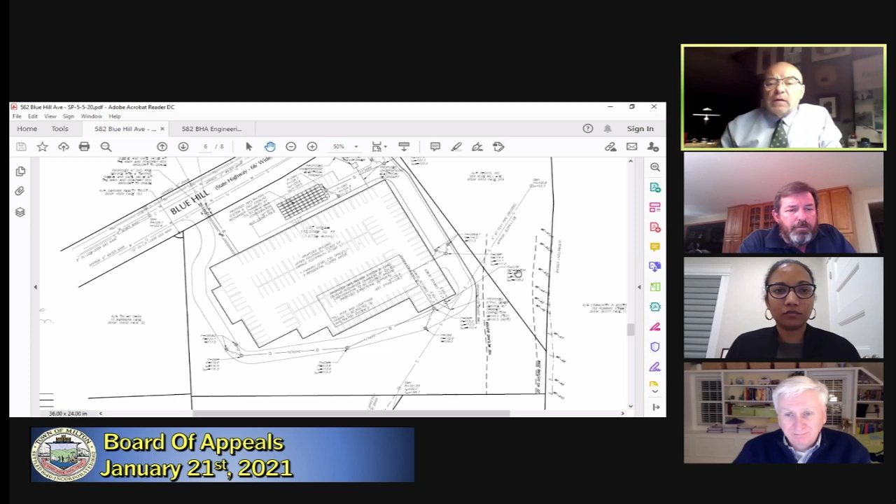I actually did have one question, and then if you would like, we do have our civil engineer, John Chessa, here as well, if you'd like to hear from him now. We would. That would be great. Great. So I just had one question about the larger infiltration basin system B. You stated that there would be observation ports to observe whether there were any signs of failure. And I was wondering if you could just describe further what those observation ports look like, and if there are signs of failure, if there's a way to access the infiltration system to make any repairs or maintenance needed.

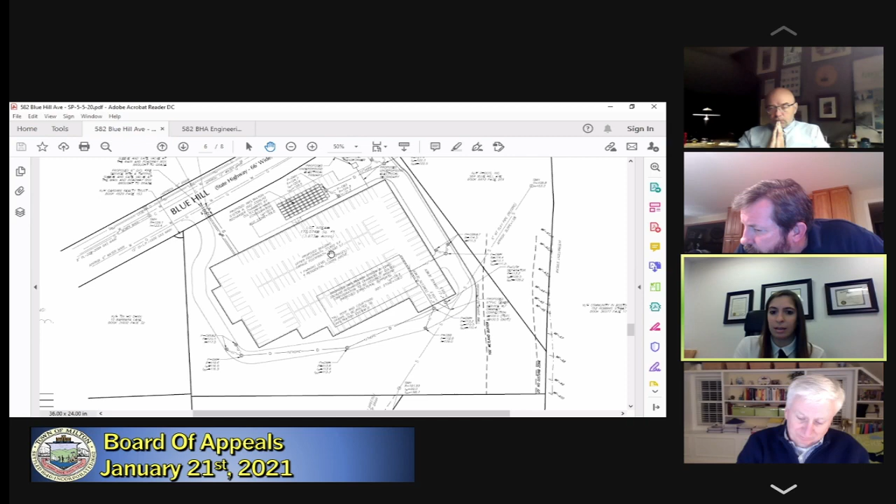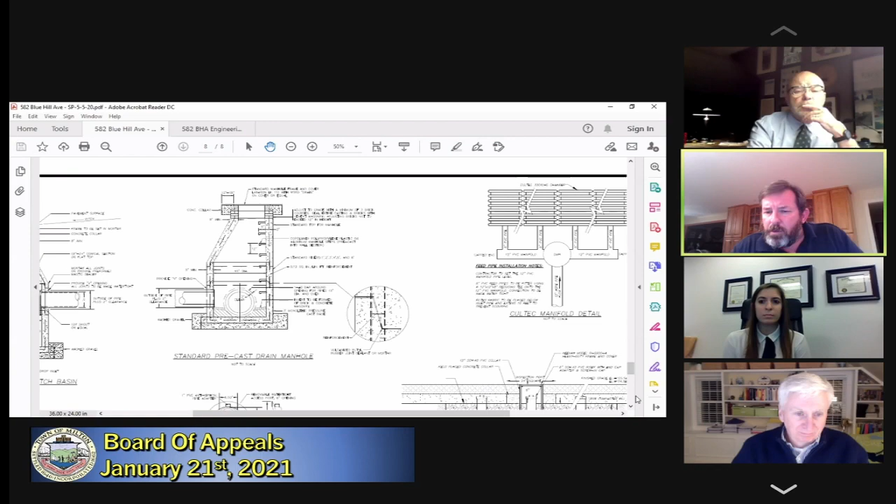Sure. The infiltration port would be probably a 6-inch PVC pipe that comes out of the top of the Cultec chamber. I might actually have one. There we go. So it's basically an inspection port. You have this, it's a cast iron fitting that would extend down and provide H20 protection for this particular PVC cap. And you'd pop the cap and you could send down a camera, take a peek, or maybe just put in a measuring stick and see if there's water down there, or flashlight or whatever.

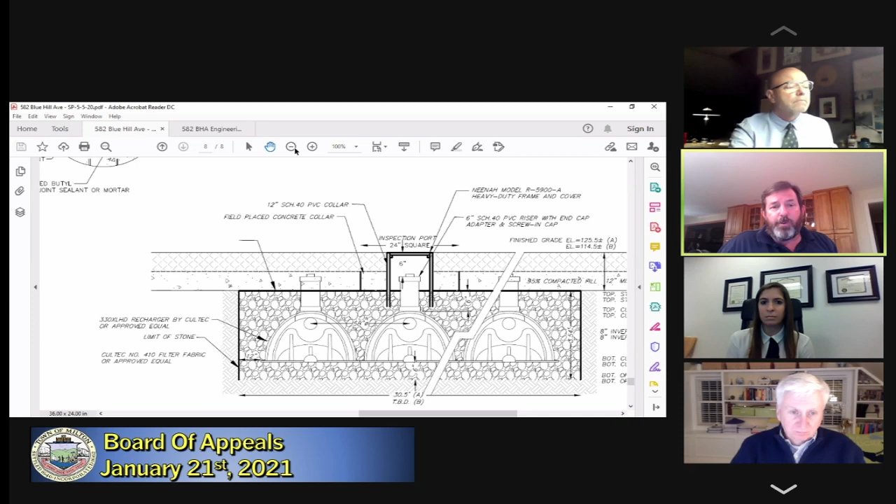Now, if it comes to a point where there is standing water, my particular preference would be that you'd vacuum truck it out and see if there's any sort of sediment that you could see as well. And then come back after another rainfall event and see if the same thing has occurred. And if it's continuous, the only real way to fix it is to tear it right back up and replace it. So that's the unfortunate aspect of it. That's why design and installation is important. So would that require tearing up the entire garage level? Yes. Okay, that's all I had.

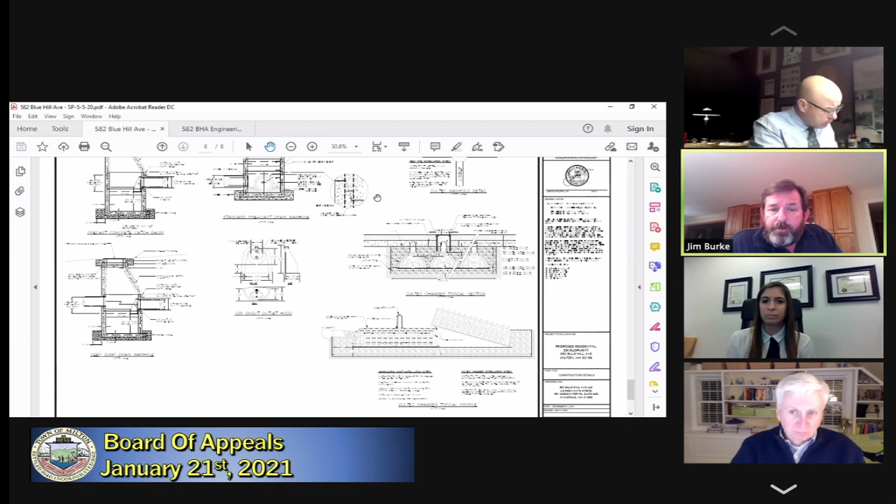So if the board is okay with that, at this time, I would like to invite Mr. Chessa to present. Okay. Mr. Chessa, I'm sorry. Yes. Welcome to the board. Thank you. I guess I'd just like to go through a few of my comments, some of the issues I think the neighbors are concerned about, and issues with the design that I think, sorry, I'm losing my headset. Some of the design issues that I think may need some more vetting or investigation. And I'll try to be fairly quick if I can, because I know it's already been a lengthy period.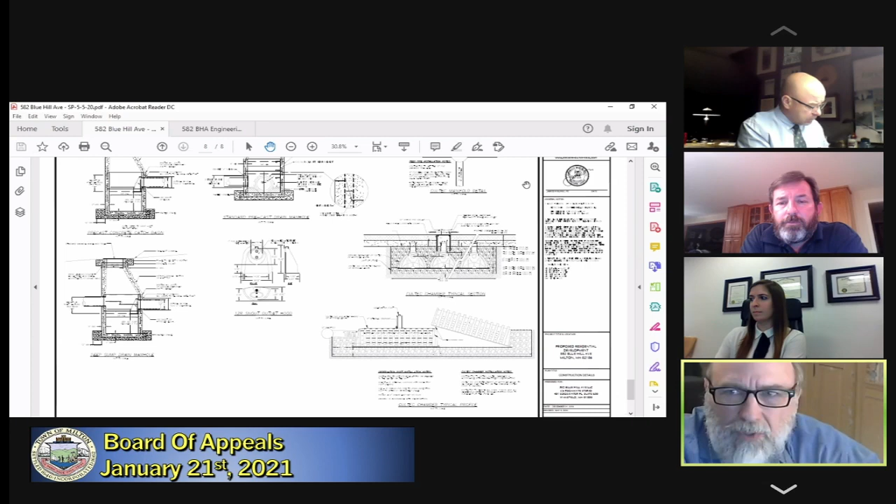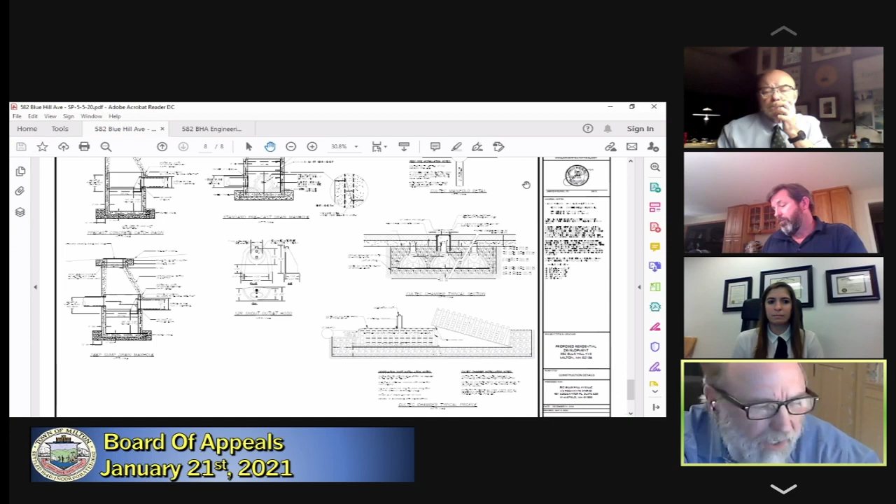So initially it was discussed how there's existing catch basins and they seem to work, but there's no indication of where anything goes. And sometimes you want to know that so that you can have an understanding of existing to proposed conditions comparison. And also, if there's a pipe going in some location that might be affecting a neighbor, it could be of benefit for them to know whether it's going to be removed or not, or how that's going to work. So I know he hasn't been able to find anything, but usually you can find where the catch basins go, if they have a pipe or if they're infiltrating into the ground. That's a base condition that's worth knowing. So I think that's something that typically is done and should be done. Maybe Jim could flip to the grading plan. Sure. Thank you.

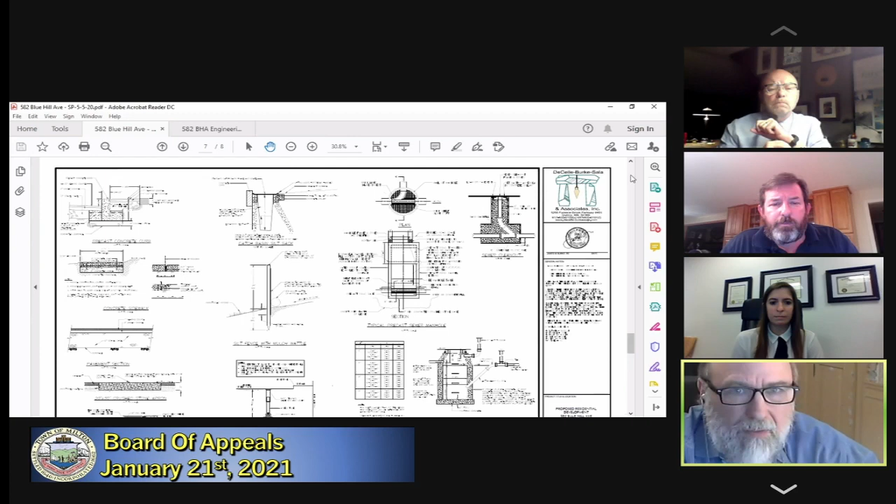The test pits had what appeared to be maybe almost 2 feet of sand over some less permeable material. And groundwater indicators, the one on the left was about 4 feet, and the other 2 were around 5 feet below grade. So that would indicate, obviously, to anyone looking at it, that the water table's probably 4 or 5 feet below grade. I mean, it's not a flat water table, or there'd be water all breaking out the slope on the neighboring houses, because it's more than a 4-foot drop or a 5-foot drop from those test pits down, just looking at the grading.

So if you have a 4 to 5 foot groundwater depth, then the proposed systems would be well into the groundwater, and they wouldn't work. They'd fill up with water from the groundwater to start. So I think one of the main things that I am going to maybe see as I go through this is you need more tests. You need tests directly where the systems are proposed to see what you have for soils there. That's in the DEP handbook. It's kind of standard practice. You need to know what's there.

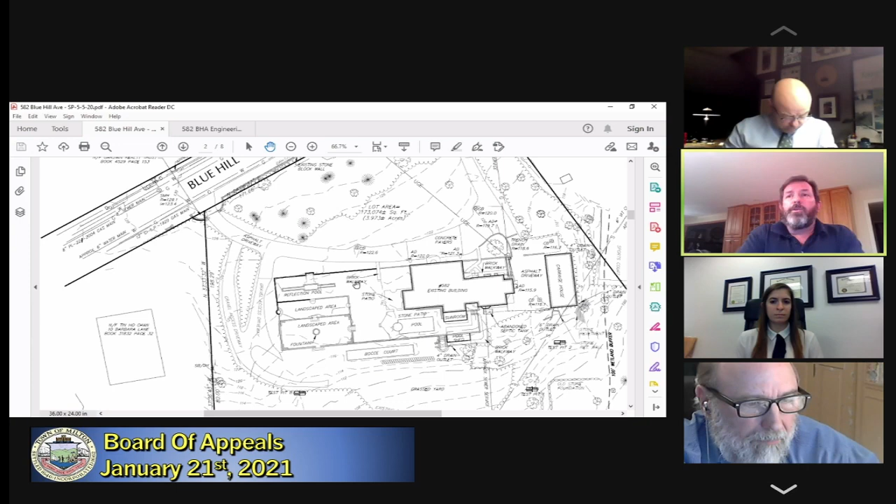So I can't really speak to who they would report to, given the request for waiver, but I certainly can discuss it and answer more clearly to that specific nature of your question at a future date. Okay. Thank you.

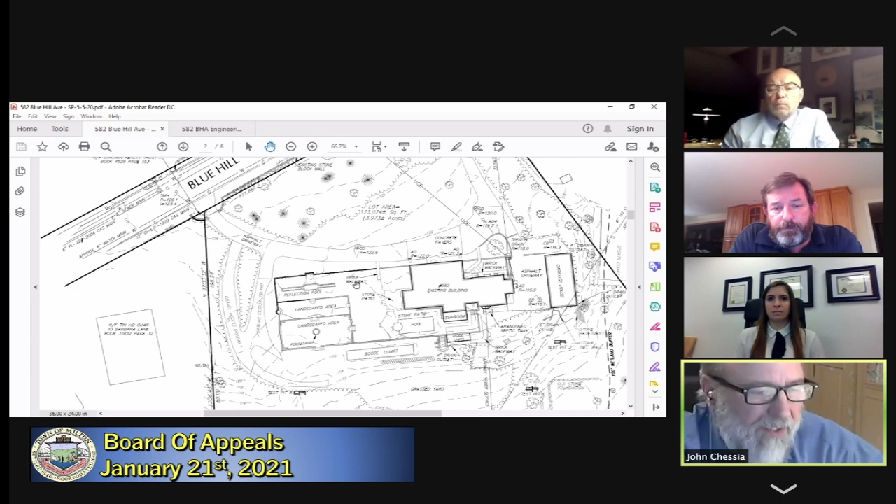Mr. Chessia. Okay. If you could flip back to that grading sheet, please, I would use that to help discuss some of the next ones. So if you look at the proposed front of the building, the existing grade is basically about 127. The 128 goes through the parking lot, and the 126 is just off the front line of the building. They're 2-foot contours. And then the slab is at 114.5. So you're talking over a 12-foot cut for the slab in the front.

So if you have water 4 to 5 feet below grade, which is more than likely the case as you go uphill, maybe a little bit more, but probably not substantially, you would be well into the water table with your basement, which means you'd end up having to put some sort of waterproofing, generally foundation drains, etc. Meanwhile, you've got an infiltration system about 12 feet off this foundation, and groundwater is going to tend to follow the grade of the land going down the hill right up against the basement, which is going to create a problem.

I scaled it to be 12 feet off the foundation, and the setback for a subsurface system is kind of hard to judge because it's not really listed. For trench drains, which they kind of mimicked, it's a lot further than 12 feet, but the minimum is greater than 10 feet. The lower system is an 8-foot cut to get to it. That side's not as much because that's where the existing house and developed area is. But even still, if you have 5 feet to water table, you're going to be in the water table. You're certainly not going to have enough separation for the thing to work properly.

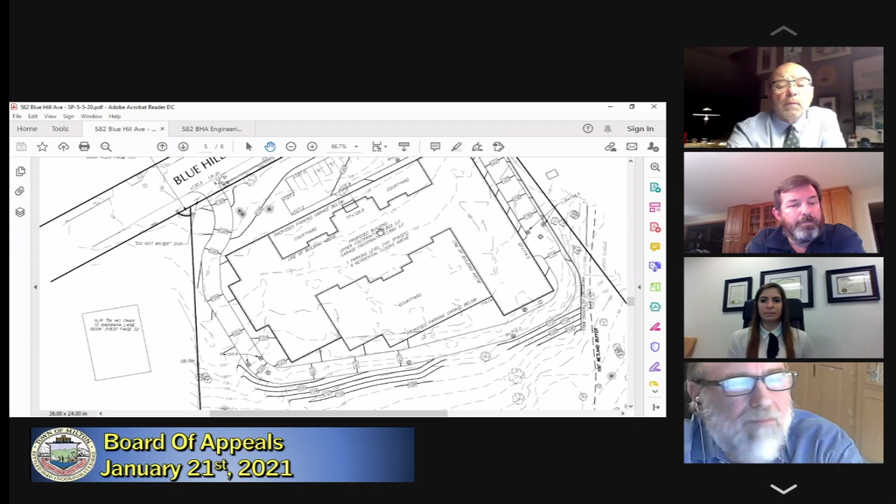Allowed to talk? Yeah. Mr. Burke, can you stop sharing your screen? Mr. Howard, are you with us? There we go. Mic's on. Mr. Howard? Mr. Howard, we can't hear you. His mic is off. I think there's a little background. Yeah. That's unfortunate. Actually, his mic just went off. Should we go to the second one? Why don't we do that and we'll come back to Mr. Howard? Thank you, Beth. Okay.

All set. Is that Barbara? Yes. Hi, everyone. This is Barbara Alavi. Ms. Alavi, welcome back. Thank you so much. Jim, thanks for your plans. It was good to see a visual as to what's going on up there. And John, thank you. Very informative. Water is a huge issue down here for us on Alfred Road. I live on Alfred Road, Barbara Lane, Meeting House Lane.